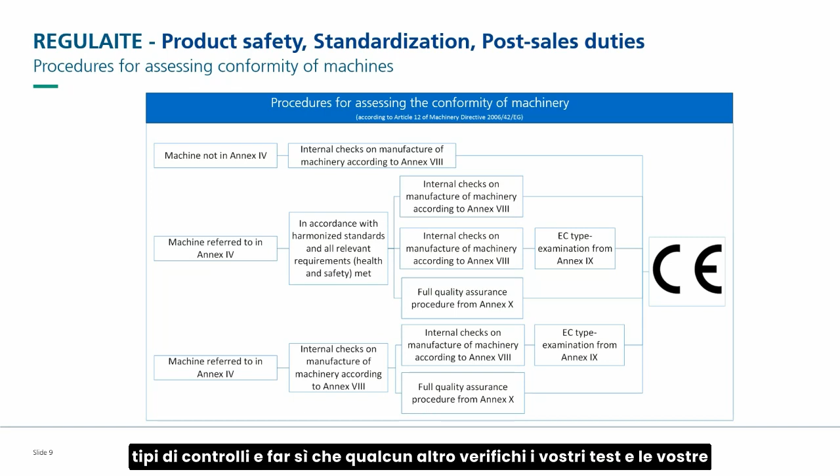So there's an annex, and if the machine is in this annex, then it means that either you're able to do the testing and validation yourself, which is the top row, or that you need to go through a so-called notified body, or you need to do some other kinds of checks and have somebody else double check your tests and measurements so we know the product is safe to go onto the market. Right now, according to Annex 4, robots are things you can do in a self-conformity process. You do not need to go to a notified body or pay somebody like TÜV to ensure your robotics application is safe. Of course, you're still allowed to, and if you don't want to take on that responsibility, that's possible, but it's not required by the machinery directive.

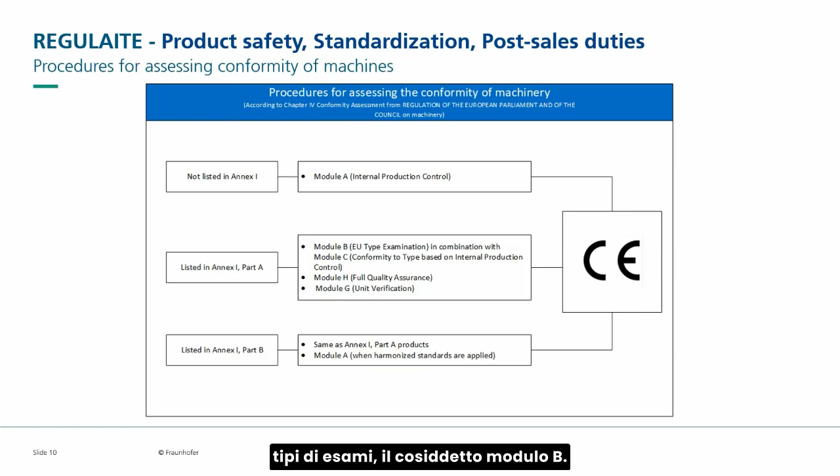If we take a look now towards the new machinery regulation, it's been streamlined a bit. Here we have different annexes, and any product that's not listed in Annex 1 you can handle yourself, what they now call an internal production control, putting the CE mark on your product by yourself. However, if you have a product listed in Annex 1 Part A, then you need to do other kinds of examinations, known as Module B, an EU type examination where a notified body checks it, or some other quality assurance mechanisms.

If we dig deeper into Annex 1 Part A, there are certain things closely tied with robotics and AI. For example, if I have safety components with fully or partially self-evolving behavior that use machine learning approaches, this is something I am not allowed to test myself. That's the idea of an AI system that is evolving, getting new data, and using that to implement some kind of safety function, like if someone gets closer, stop. I can train this beforehand using AI methods, and once it's a model that's trained and not changing anymore, with no self-evolving behavior once it's on the market, then it's not part of Annex 1 Part A.

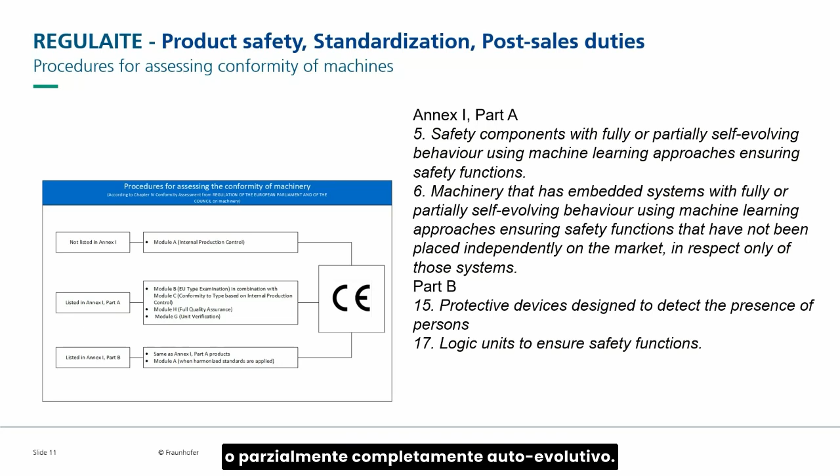But if I do have that self-evolving behavior, then it's something I won't be able to put the declaration of conformity on myself as a manufacturer. Continuing this, we also have machinery with embedded systems that have fully or partially self-evolving behavior. Also, if I have protective devices designed to detect the presence of persons, or logic units ensuring safety functions, those are also things I'm not allowed to test myself according to this. An example is a designated safety camera system that uses AI to detect people. These protective devices require outside expertise to validate before I can put the CE mark on the product.

From the perspective of product safety, what's often important is the idea of safeguarding measures. We have what's known as a hierarchy of safeguarding measures, taken both from the manufacturing perspective and later downstream as an end user. The idea is, as a manufacturer and end user, I want to start at the top, and only if I'm not able to ensure safety based on that top level do I go down one step lower.

So of course, it's better to have an inherently safe construction. As an example, I have a robot limited by its motors, gearing, and inertia, such that even if it were to go at maximum speed and come into contact with me, those contacts would be below the biomechanical thresholds allowed for that specific body part. So no matter what happens, no matter how I control it, it can't hurt you. That's the idea of inherently safe construction.

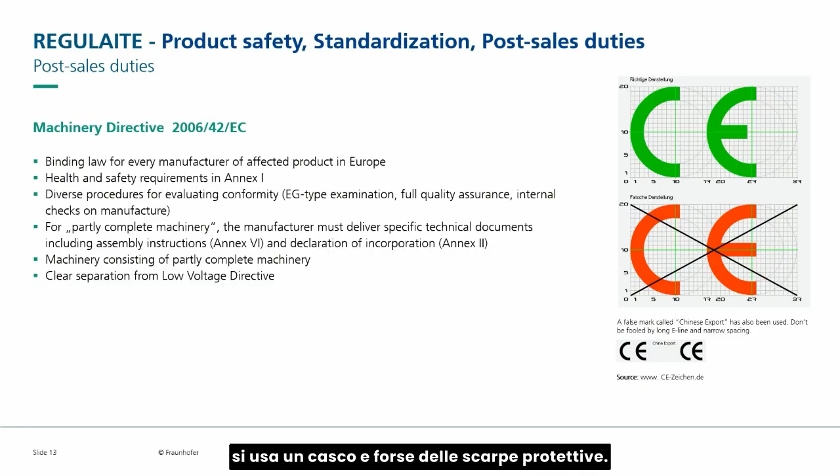protective shoes. So to wrap this up, again, as we've said, we have the Machinery Directive, and this is binding law for every manufacturer, everybody who's bringing a product onto the market in Europe. And the health and safety requirements you have to consider are in Annex 1.

We have different procedures for evaluating the conformity, and it's important to understand that if I have AI in certain features of my system, like in the safety functionality or in the control system, then I'm not going to be able to do this conformity declaration by myself.

If I'm looking at partly completed machinery, there are also some things that I need to consider. What's really important there is that I also have assembly instructions, for example, how to integrate my robot with other systems. And that's going to be a little bit different than if I have a complete system, of course.

Yeah, it's of course a separated kind of idea from other directives that are available, such as the Low Voltage Directive, which is also very important for robotics.

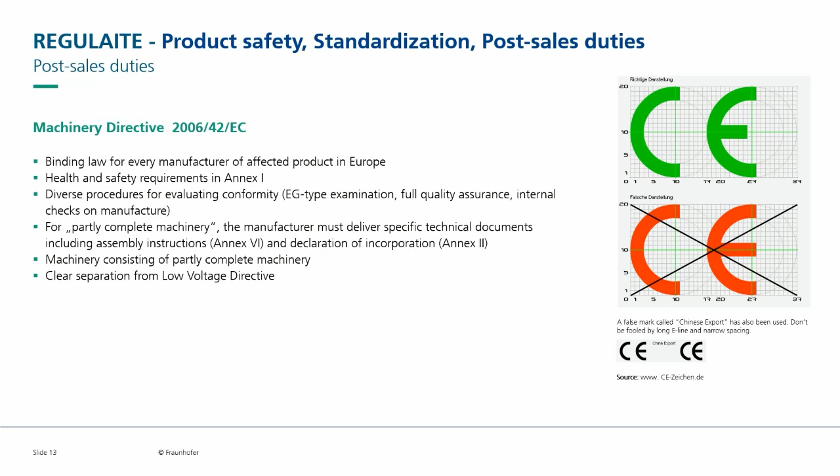Okay, so moving along, what we'd like to talk about now is the risk assessment process as part of the product safety approach. And what does this look like, and what do I have to do? And to give you some tips and tricks and ideas about how this process looks.

As we've already said, the main legislation regarding product safety in Europe is the Machinery Directive, soon to be the Machinery Regulation. We also have the Product Safety Directive. So the question is, how do I really define and know when a product can be considered safe? This is a really tough question because how do I know the different things that can happen and how do I plan for that?

And the answer is, it's considered safe when the risk assessment and the risk analysis shows that the residual risks that arise from using a specific product in the different ways that the manufacturer or the end user thinks they will be used are as low as possible.

We also have what's known as the RAPEX Risk Assessment Guidelines. These are online from the European Commission, and these are something that you can use to guide you through the risk assessment process. We'll jump to the idea of standards.

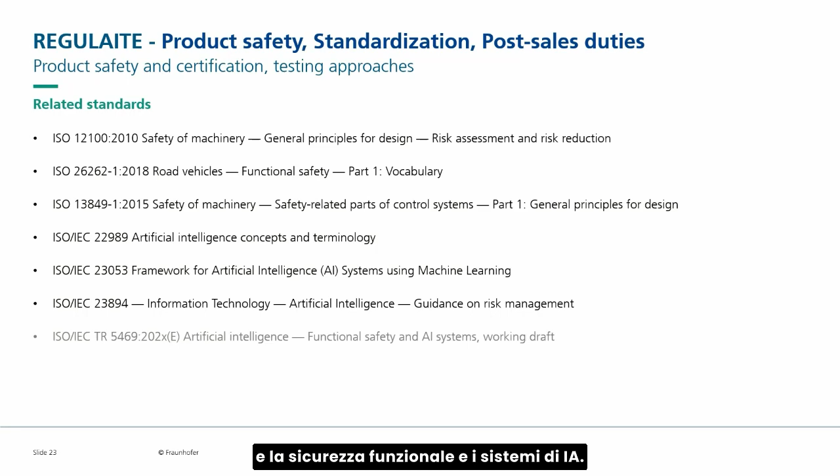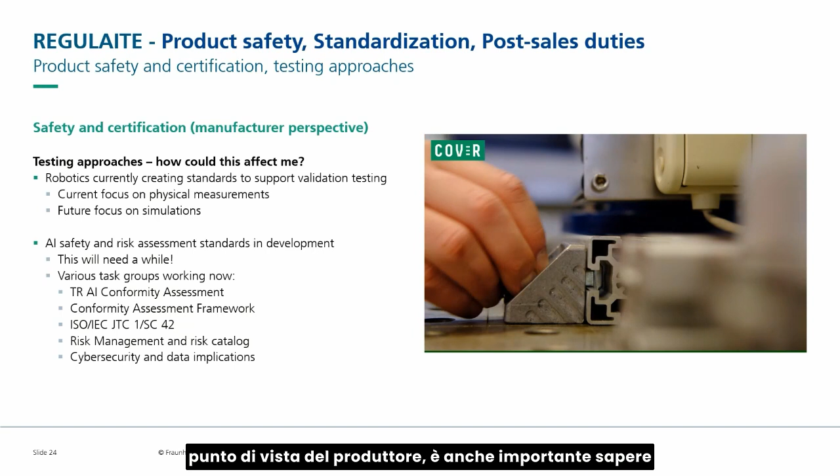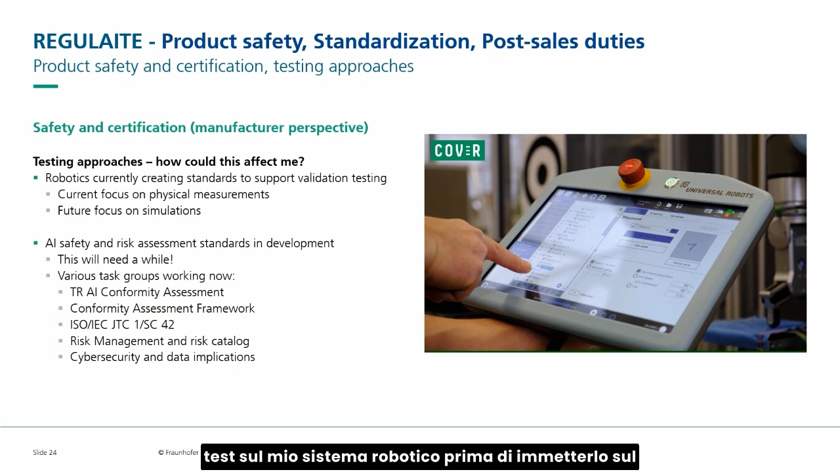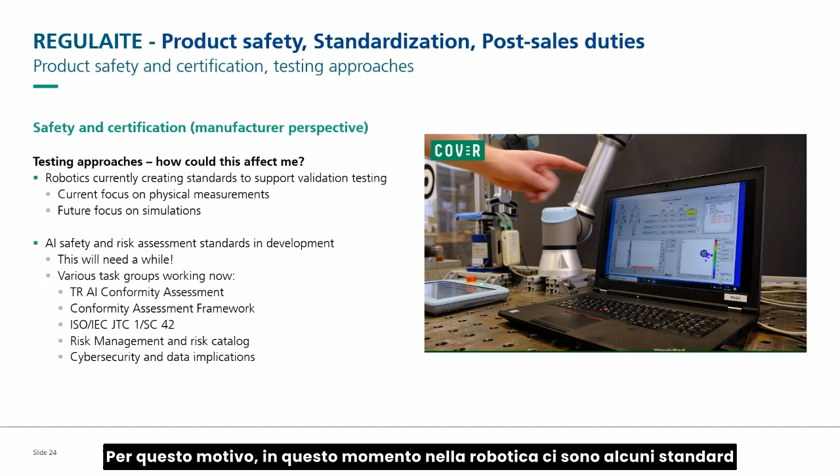When we talk about safety and certification from a manufacturer perspective, it's also important to know that it's part of the CE process, and what's also defined in some of the relevant robotic standards is that I need to do some own testing of my robotic system before I put it on the market if it's used for collaborative applications. Right now in robotics, there are some standards that are supporting me to guide me through this validation testing. This is what we're seeing in the video, how I can measure the forces and the pressures.

The future focus of these standards will be towards simulation, being able to do this through some kind of formal verification, without having to conduct a physical measurement, which from a manufacturer perspective is very time consuming. And it's also not really in line with the idea of a flexible robotic system.

Because right now, if I have a robot that is force and power limited, and it could come in contact with a person, I'll need to do these force measurements like you saw in the video. And if I change the program in a significant way, I will need to redo these measurements. That's far away from the idea of flexible robotics that are changing and deciding how they work in changing environments. If we have to stop everything and do a new pressure and force measurement in between, that's not really how I think robotics of the future will look.

So that explains this idea within the standardization community, which is also being pushed by manufacturers, integrators, and end users of robotics, that this is simplified in a way so that it can happen online in a computer, in a simulation.

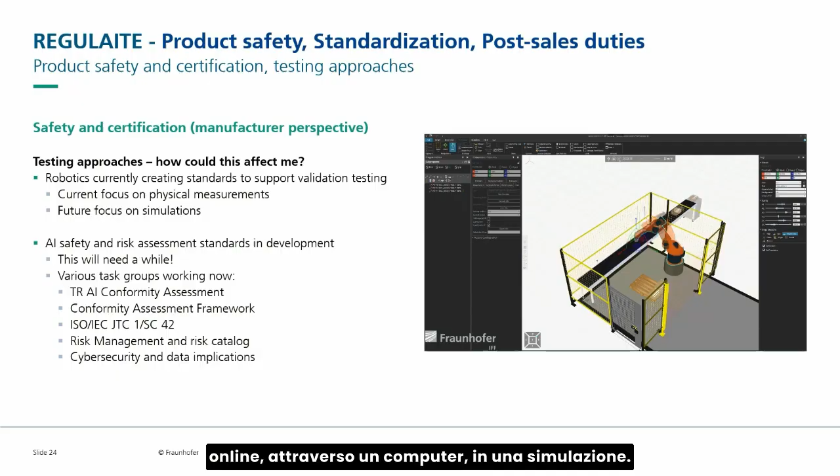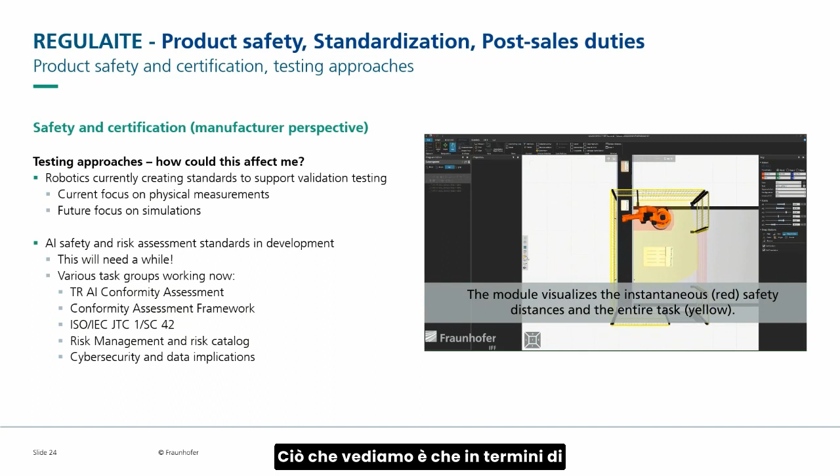What's also really important to realize, here we see in the video an example of how these kinds of safety assessments online could look. What we also see is, in terms of robotics with AI and functional safety, there's also going to be some kind of testing involved. This will also be in the standards, but this is going to take a while.

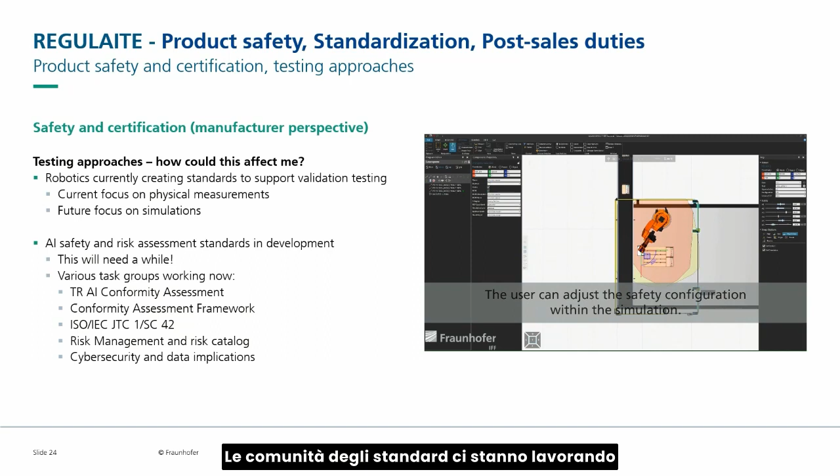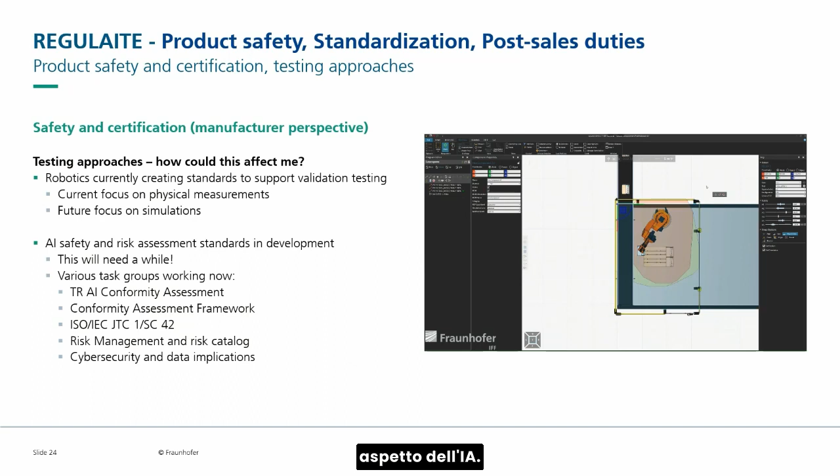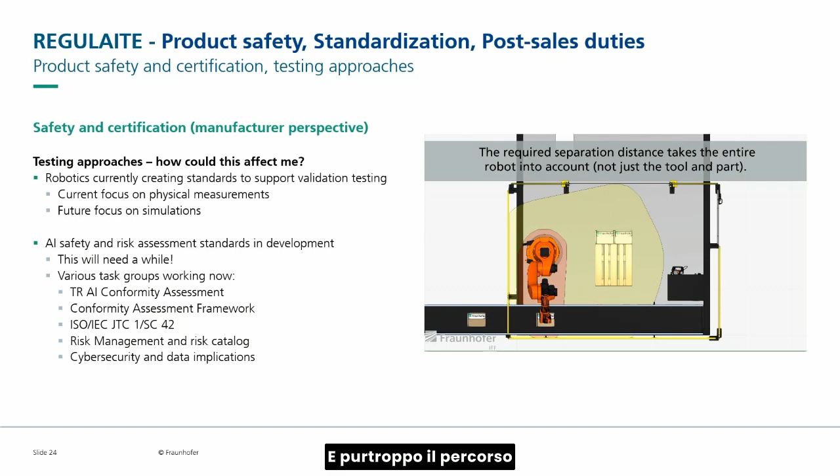The standards communities are working on this right now. We have the joint committee, the SC42, between ISO and IEC, and they're looking at all kinds of different things regarding AI, and this is part of it. Of course, we also have to consider things like cybersecurity and data implications. It's going to be a long path before we have these standards in place, unfortunately.

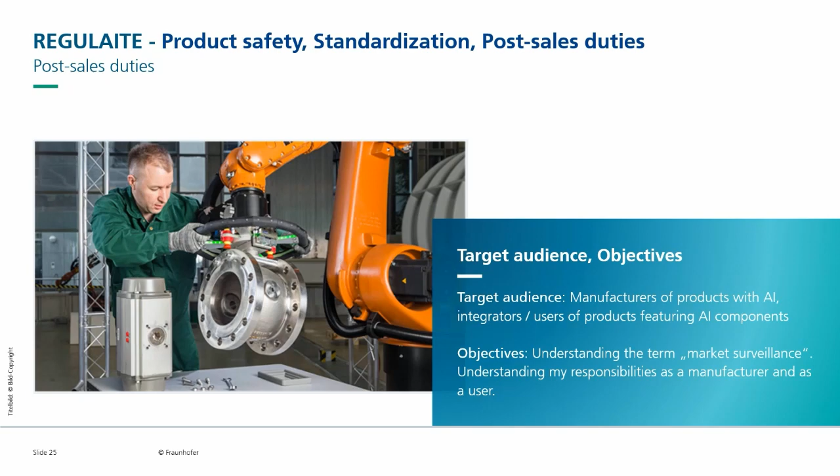Now we're going to look at post-sales duties. As a manufacturer, if you do the CE mark, you need to complete technical documentation, and you need to keep copies of this available, and also keep copies for the different versions of the product that you put out on the market from year to year.

As an end user, it's really important you have some kinds of brochures, descriptions, data sheets. It's also required that you have maintenance plans if the product requires some kind of maintenance. We have product documentation, and this is really important. These are things like electrical plans, circuit drawings, layouts, and any kind of static calculations you're doing if you have forces involved where it could be critical.

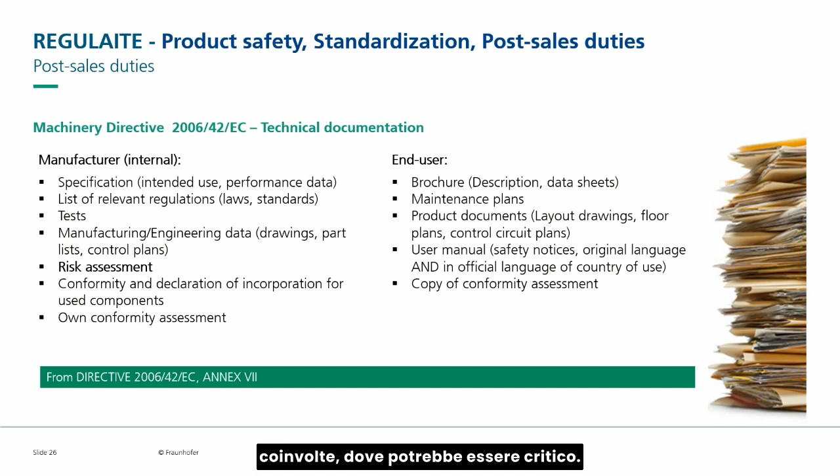What's also important is you have the user manual. It has to be in the official language of the country it's being used. We're all familiar with the stack of the really thick user manual with 20 different languages or so. In the new version of the machinery regulation, it is okay that these are available online, so the idea is we'll reduce the amount of paper being sent around.

What's important is that you keep a copy of the conformity assessment, which basically states which standards you adhere to, the name of the product, when it was put on the market, the address of the manufacturer, and of course the signature of the person who is responsible.

If you're the manufacturer, you also need to have some things internally in case something happens, and you need to keep these. The most important thing here is the risk assessment.

So if something happens, if somebody gets hurt using a robotics application, an example that was in the press recently: there was a chess-playing robot that moved the chess pieces while playing with a human. A kid was playing against the robot. They put their hand back on a part. They were done, let it go. They put their hand back on the piece, but the robot was already moving and didn't expect the person to grab it, and basically crushed the kid's finger and broke it. This was really bad.

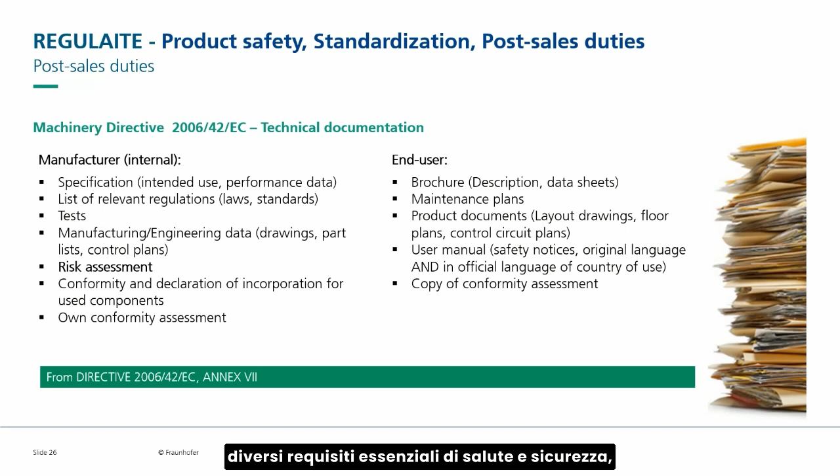Again, what we see here is that there's lots of documentation, and documentation is really important because that's the way of proving that you have considered all the different essential health and safety requirements when we're talking about AI and robotics.

As a manufacturer, we talk about post-sales duties and market surveillance, and this means you have to put the CE mark on your machine. It means this technical documentation must be available, and if the authorities ask for it, it should be shown to them upon request.

As we saw before, some of these things, like the risk assessment, are for the manufacturer only, internally, and they do not need to share this with their customer. But if the authorities come, they do need to share it with them. And if they didn't do a diligent job, there will be lots of questions asked.

As a final step, it's important that as a manufacturer, you could be asked to take corrective actions and remedy any non-compliance that arises within a reasonable time frame.

When we talk about post-sales duties from the user perspective, you need to make sure that the manufacturer provides you with instructions. And if they don't, it's up to you to tell them there's something wrong here - I'm supposed to get instructions with every product that I'm buying.

It's also important for you as a user of these products to conduct your own internal risk assessment, document that, and show that the people using your system, if you're the manager, have been trained and that you've documented that you've informed them about the different risks and the risk mitigation measures and how they should act.

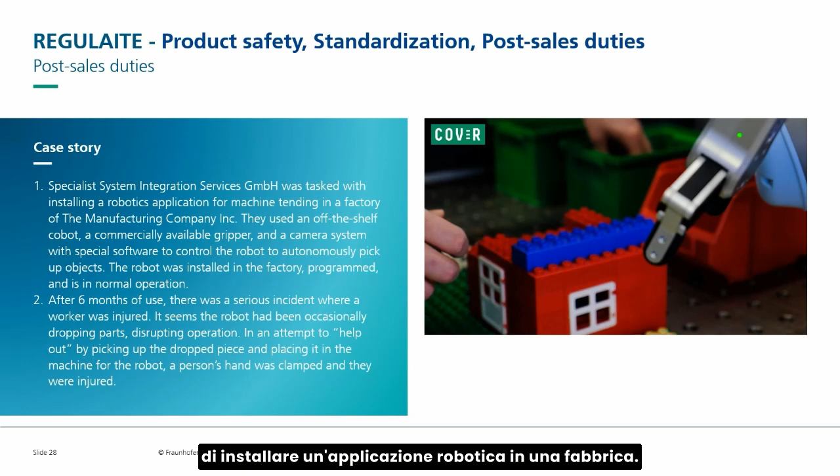We have a fictive manufacturer who was tasked with installing a robotics application in a factory. The factory owner contracts specialist system integration services, who come in and use an off-the-shelf cobot, integrating it with a gripper and a camera system to perform some kind of operation. This is being used in the factory.

So it's pretty clear who the manufacturer is, and it's pretty clear who the end user is. After six months of use, something happens.

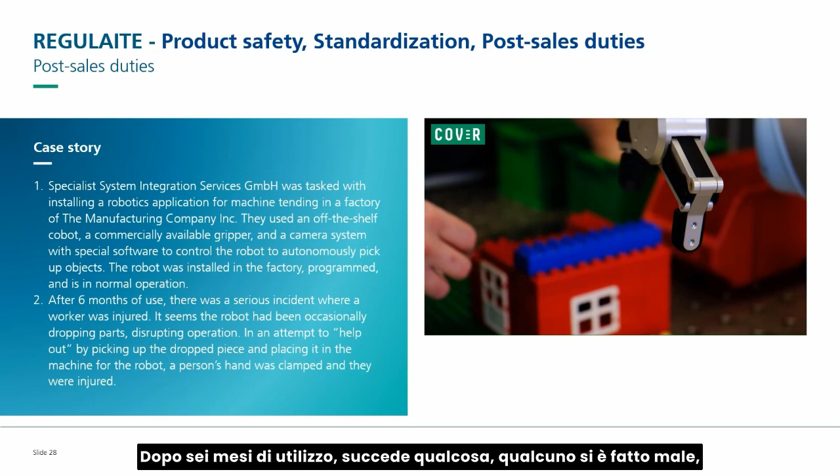Somebody was hurt. It seems the robot was dropping parts every once in a while, disrupting operation, and the person reached in when they shouldn't have, trying to help the robot resolve the issue without it going into a stop. In doing so, their hand was clamped and they were injured.

Here's an idea in the video of how some kind of clamping could look. Okay, so what happens next?

The local health and worker authorities come in, and what they're going to want to know is if you report the accident. Then the authorities know about it, and they're going to do some investigation. So they're going to want to see the CE certificate and the risk assessment documents.

In this case, for example, they'll see in the risk assessment that the risk mitigation that was chosen was power and force limiting. So what they're going to do now is ask, where are the measurements? Where is the validation measurement that you should have done to prove that the forces when a collision occurs are below this certain threshold? In this case, let's say they didn't know.

They had thought that relying on the robot's program was enough to say it was programmed to stop at a certain force, and that's enough. But that's not enough. And that's why the validation measurement is important, because these sort of applications are very complex, and it's not just the robot program itself that can limit the force. There are certain things like the pressure involved, and also the geometry of the parts being moved around, that play a large role here.

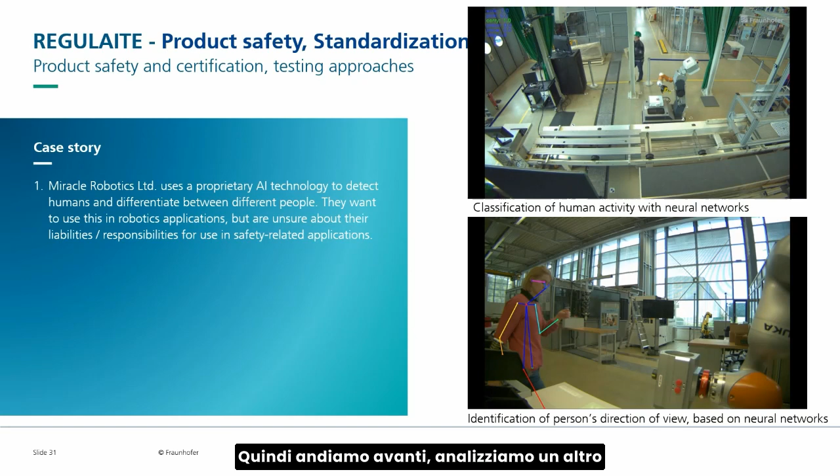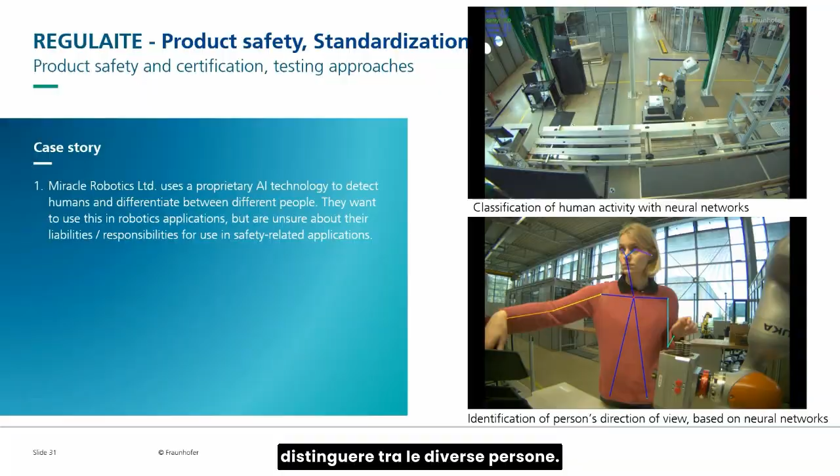Okay, so moving forward then, let's look at another use case where we have a company that's using AI. We call them Miracle Robotics Limited, and they're using a proprietary AI technology to detect humans and to differentiate between different people. They want to use this in robotics applications, but they're not quite sure what are the liabilities, what are their responsibilities when they're using this in a safety-related application.

So let's take a look. What do we learn today? We see that if we're talking about safety-related applications, this is going to fall under Annex 1, Part A for CE marking, according to the new regulation. So that's one thing to consider, that we're going to need to go to a notified body, and they're going to have to do this process with us in terms of testing these systems.

The next question that we're going to ask, of course, is whether the application is self-evolving or not. Because that's, I think, also a big part of whether it falls under Annex 1 or not. And then it's important to consider the risk assessment. What are the risks that have been considered? What's the hierarchy of mitigation measures that have been applied? And then also, what is the intended use for humans, and how can this foreseeably be misused?

And that's also an important part of the risk assessment process. As a final step, it's important to understand what happens if something malfunctions. Here it's important to go technically along the entire technological tool chain to say, okay, from my computer, from my camera system, how many different cameras do I have? Are they redundant? Can I check that if one camera isn't working but the other one still is, that they can check each other? So what are the layers of safety-related technologies that are involved? Those are some of the considerations you're going to have to do as a manufacturer.

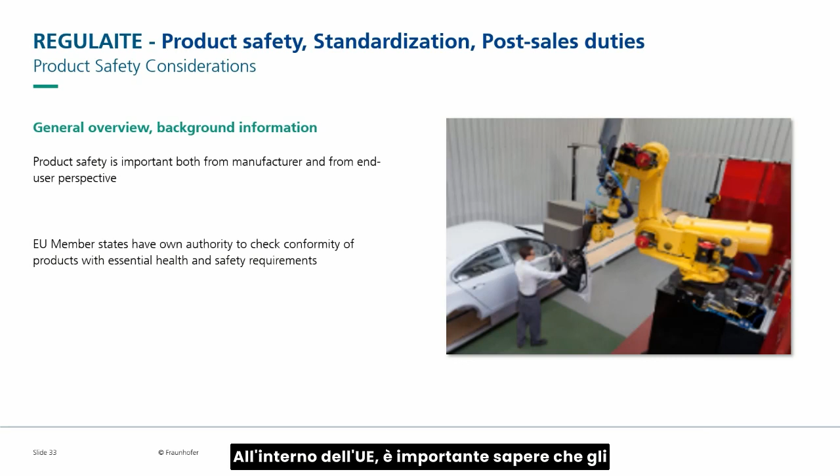Tying it all together, as a general overview, product safety is important both from the manufacturer perspective and from the end user perspective. Within the EU, it's important to know that the member states have their own authority to check conformity of these products to ensure that essential health and safety requirements have been fulfilled. As a manufacturer, you need to be aware of your obligations to maintain documentation. As a user, you also need to be aware that you need to ask for these, make sure that you have them, and that you also do your own internal risk assessment.